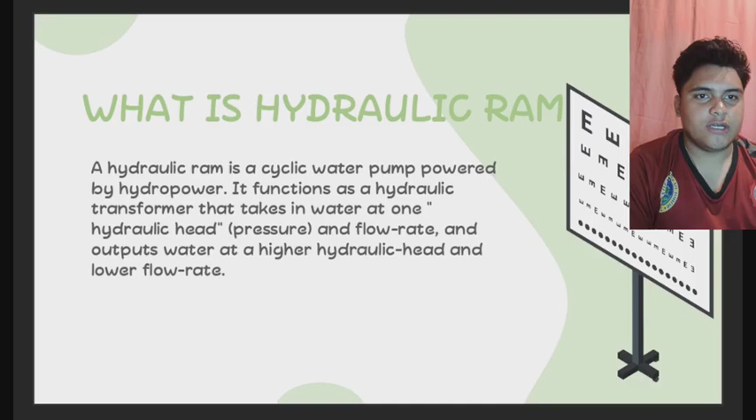Then the history: the hydraulic ram is a very old and well-proven technology in lifting water. In 1772, Englishman John Whitehurst invented a manually operated precursor of the hydraulic ram called the pulsation engine. The first one he installed in 1775 raised water to a height of 16 feet or 4.9 meters.

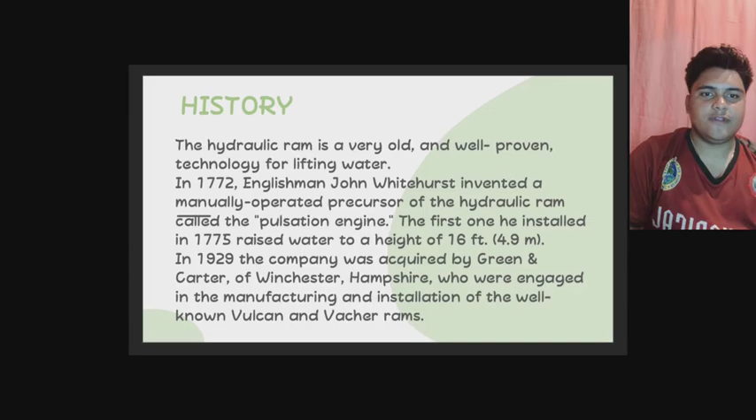In 1929, the company was acquired by Green and Carter of Winchester, Hampshire, who were engaged in the manufacturing and installation of the well-known Vulcan and Vacher rams. Then the typical components of a hydraulic ram water lifting system: the source, and there are different types of source like stream, spring, river.

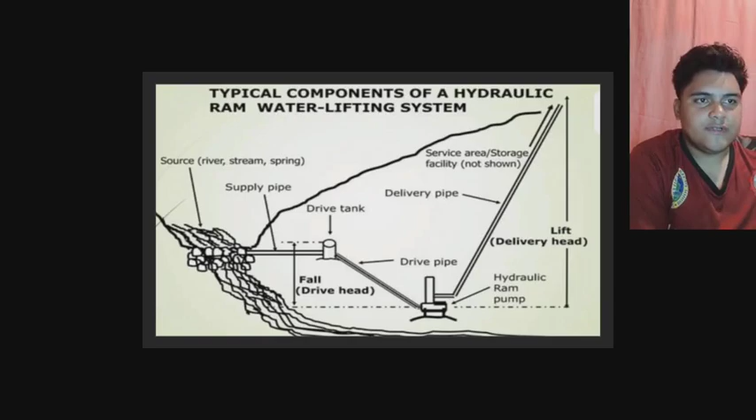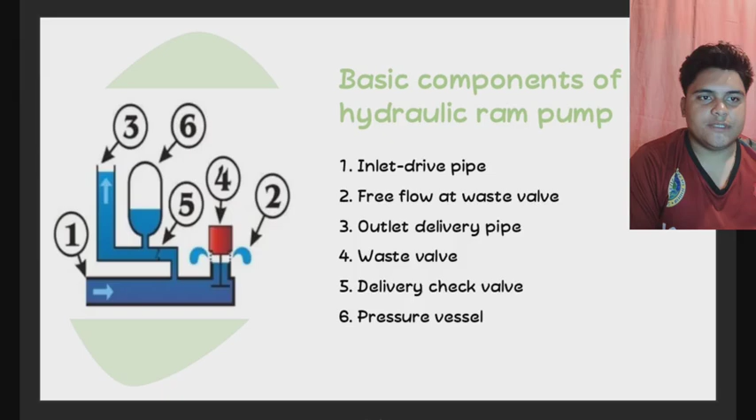Next is the basic components of a ram pump. Number one is the inlet drive pipe. Number 2, the free flow at waste valve. Number 3 is the outlet delivery pipe. 4 is the waste valve. 5 is the delivery check valve. Number 6 is the pressure vessel.

The description of parts. A hydraulic ram has only two moving parts: a spring or weight loaded waste valve, sometimes known as the clack valve, and the delivery check valve, making it cheap to build, easy to maintain and very reliable. In addition, there is a drive pipe supplying water from the elevated source and a delivery pipe taking a portion of the water that comes through the drive pipe to an elevation higher than the source.

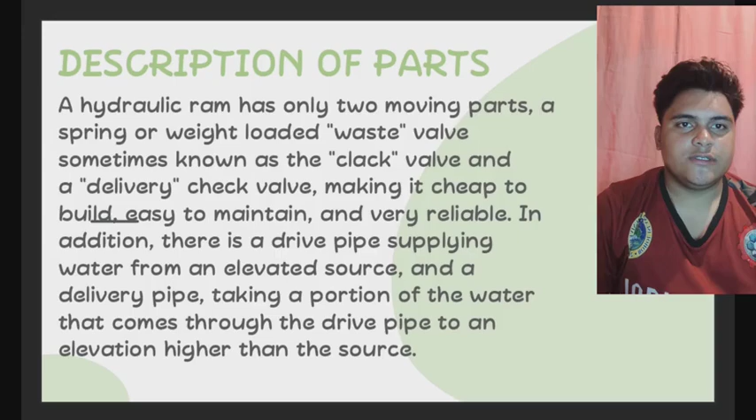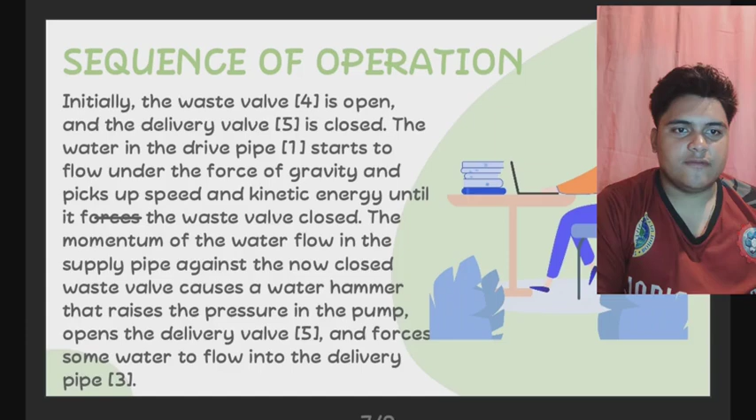Then the sequence of operation. Initially, the waste valve is open and the delivery valve is closed. The water in the drive pipe starts to flow under the force of gravity and picks up speed and kinetic energy until it forces the waste valve closed. The momentum of the water flow in the supply against the now closed waste valve causes the water hammer that raises the pressure in the pump, opens the delivery valve, and forces some water to flow to the delivery pipe.

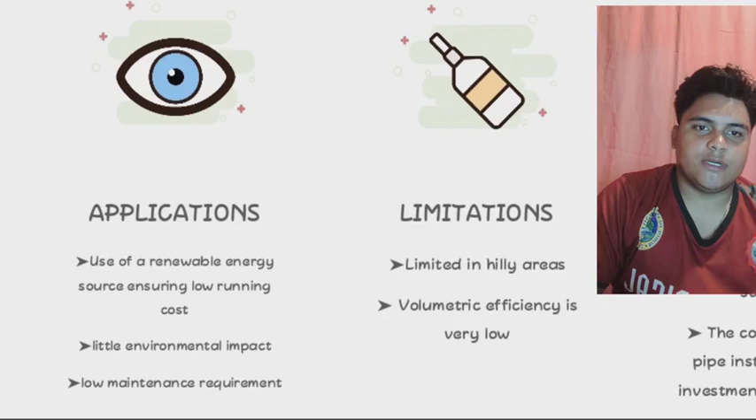Applications of hydraulic ram. Use of a renewable energy source, ensuring low running cost. Next is little environmental impact. Okay, makatabang man siya. Then next is low maintenance requirement.